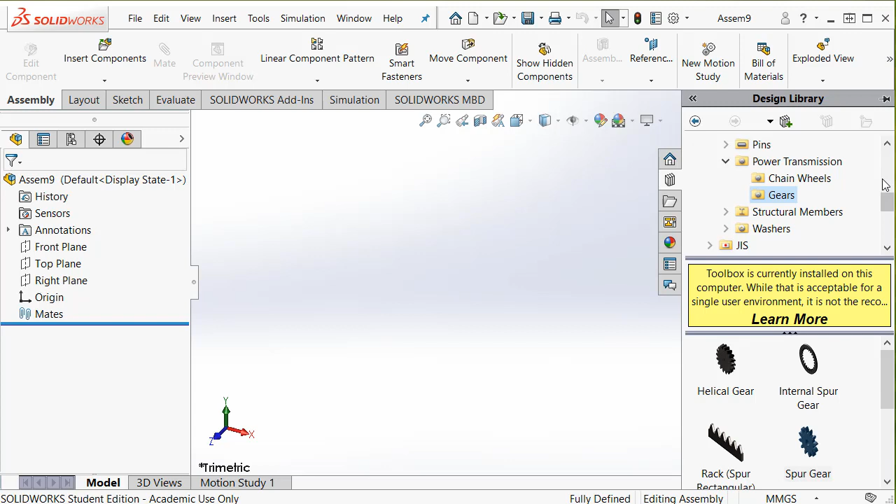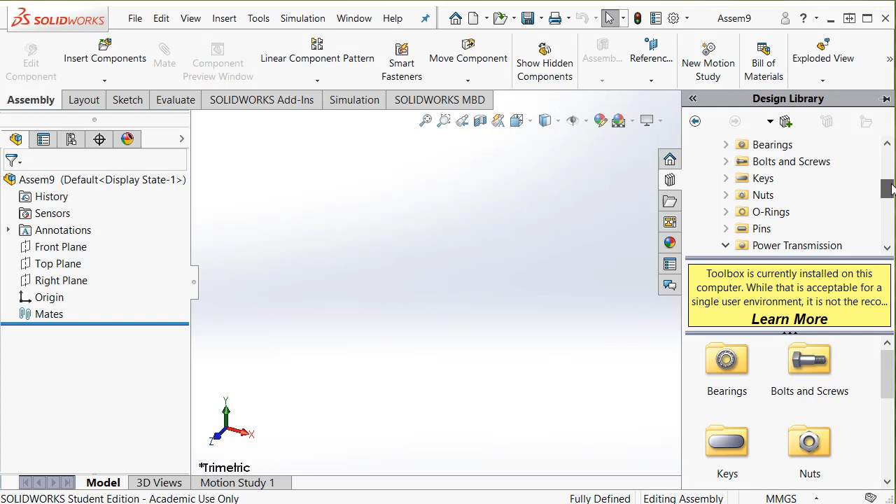Look in here, I'll just go back out of there a little bit. Yeah, see if you've got the toolbox installed. If you haven't, we'll show you how to get that done later. Then inside of the toolbox there's a whole lot of parts, but they're drawn using different standards, and we want the one using the ISO standard, so we go in there, open that, and you go down and you can find power transmission, so open that, and in there you've got gears, so open that, and here's a spur gear, so just grab the spur gear, grab it, chuck it there.

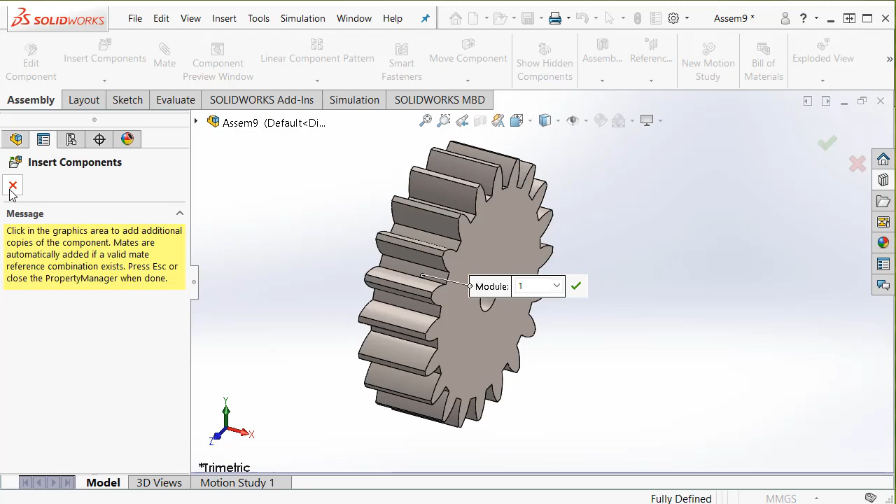Okay, now the spur gear might not be the way you want it at the moment, but over here on the side there's places where you can change it. So for this one, we're going to let the module be 1 and the number of teeth be 20, that's okay. The pressure angle can be 20, that's fine. How thick the gear is, we're setting to 6 millimeters, and the hole through the center we're setting to 3 millimeters, and that's all we have to do. We can just say that's what we want, and we've got a gear. We don't want any more of them, so we'll get rid of that, and there is our gear.

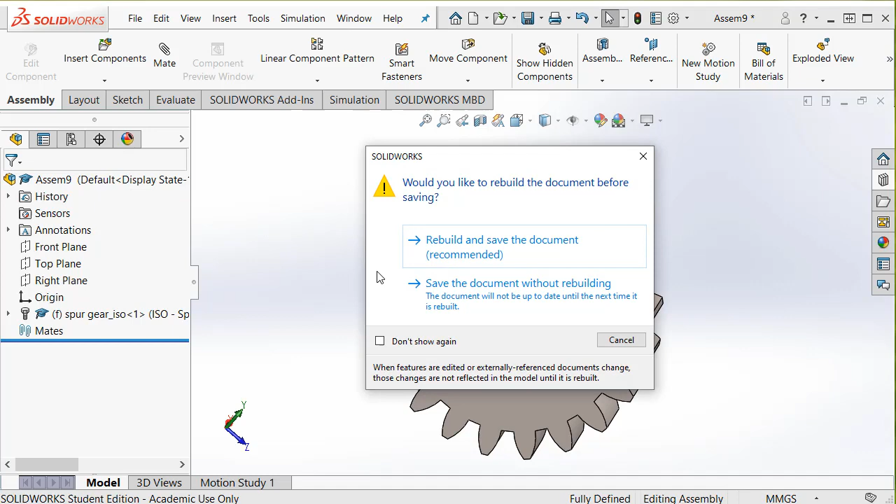Unfortunately, that's an assembly file at the moment, and we want this to be saved as a part so that we can use it to build the gripper onto. So go to File, Save As. We can rebuild it, that's alright. Save As, and here I might save it as my gear, but the important thing is to change this from an assembly to a part. That's disappeared off the top of the screen, so I'll just change it to part. There we go, we've changed it to a solid part. It's called Gripper Gear, and it's got that solid part suffix. And in my case it's going on the desktop, so that's done.

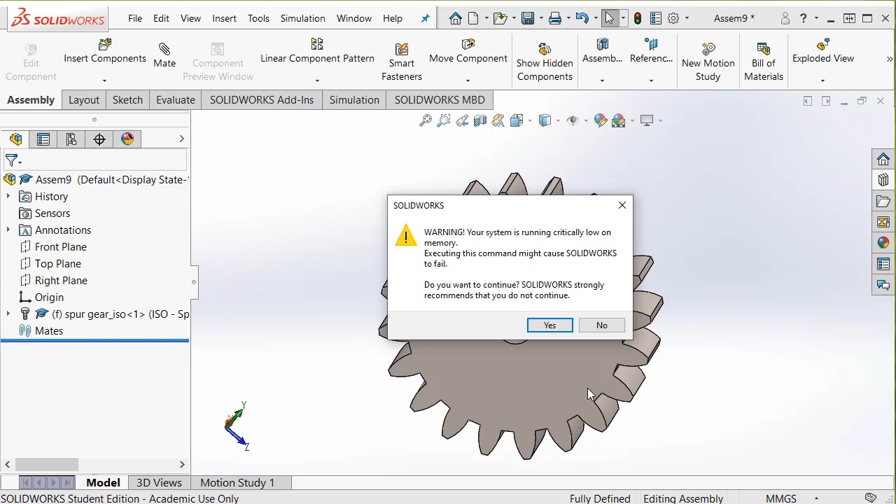Okay. We're just going to continue. Now, we don't really want that file anymore, so we can close it. And then we can go File, Open, and it was called Gripper Gear, I think. There it is. We don't want to proceed with feature recognition. So we've now got this gear opened as a part.

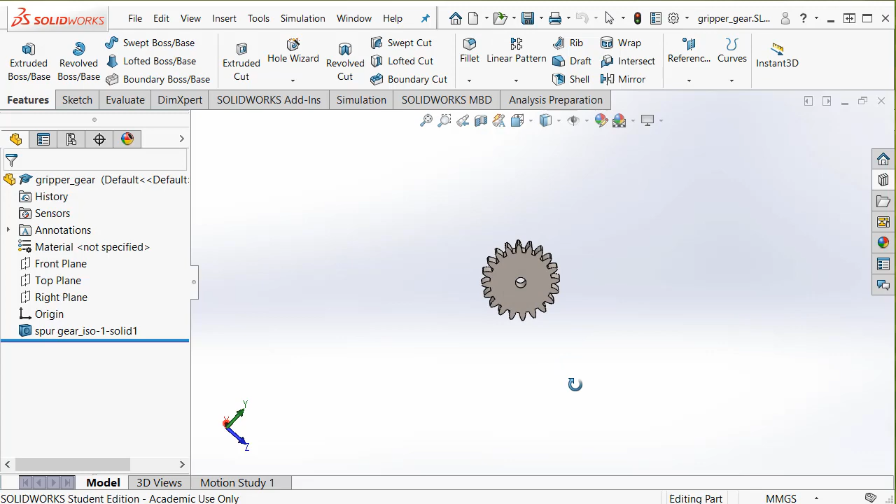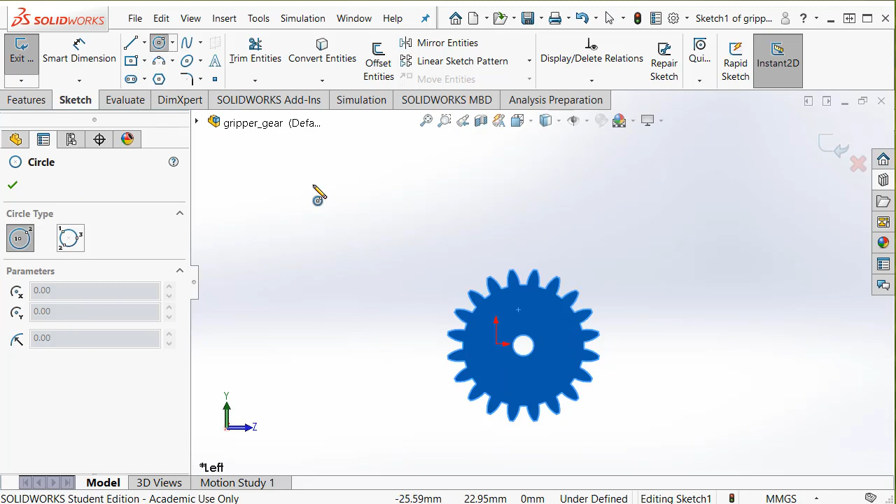Okay. So I'm just going to look straight at it. And then right click on it and draw a new sketch. So the thing that we're wanting to pick up is a cylinder whose diameter is about 36, I think. So we'll put the diameter in.

And then we'll just bring this circle so it's sitting. This is the thing that we want to pick up, and I want the center of this circle to be more or less in the middle of these two gears, so I'm going to put it about there. Okay, that's the thing that we want to pick up. So what we want the gripper to do is to follow around this line so it will nicely match that circle.

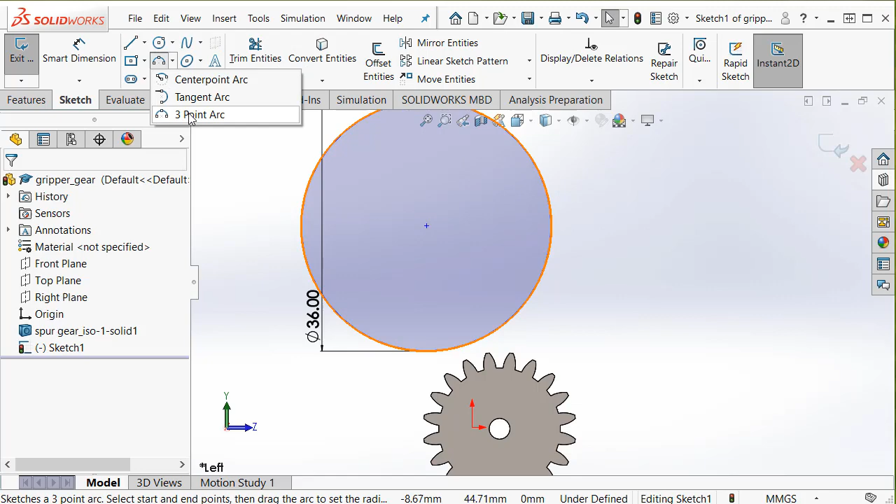And the rest of the gripper we'll put out here somewhere, so I'm going to do a 3-point arc. I'm going to start about there, and go around to about there, click onto there, and the radius of that arc, you can see it coming up on the screen there. It's about 27. I'll set it to be about 28.

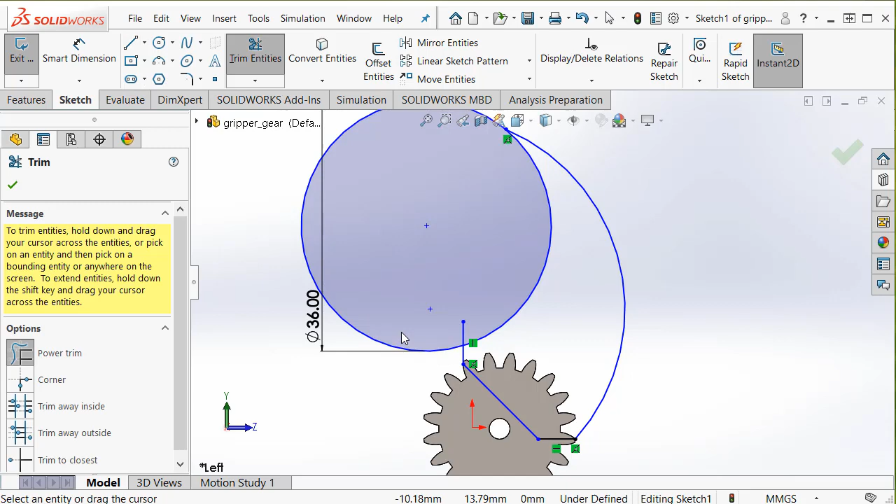And then I'm going to add some straight lines, maybe one from there up to there, and another one from there into there and across to there. Then I'm going to get the trim tool and trim some stuff out. Okay, so that's going to be my gripper. So I've finished trimming that, and now we just need to extrude that.

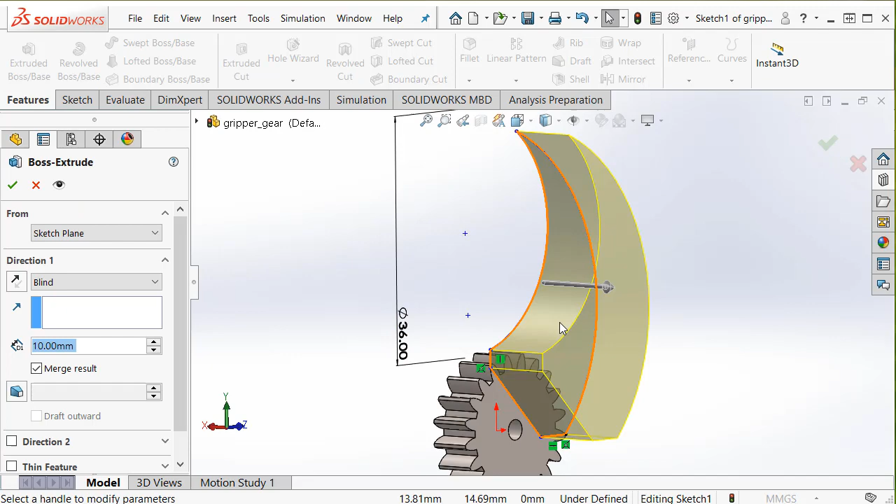So go to Features, Extruded Boss/Base, and we're going to go the other way, and we're going to go 6 millimeters. Tab on that and go Enter, tick on that, and there we have a gripper. Okay, so that's our right gripper.

Now you might think that to make the left gripper you just make 2 right ones and then just turn it around like that, and you've got the right one there and the left one there. But there's a problem with that. If the left gripper is made to be a mirror image of the right one, when you put the two together they won't mesh. You can see the tips of the gears are touching each other and the gears aren't meshing. So on the other gripper, this extra bit that we've added needs to be rotated around so that that tip goes into a valley on the other gear.

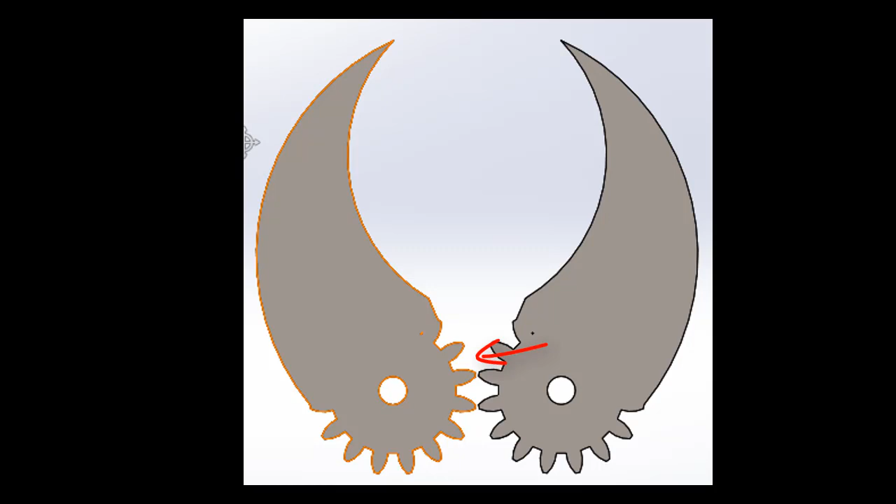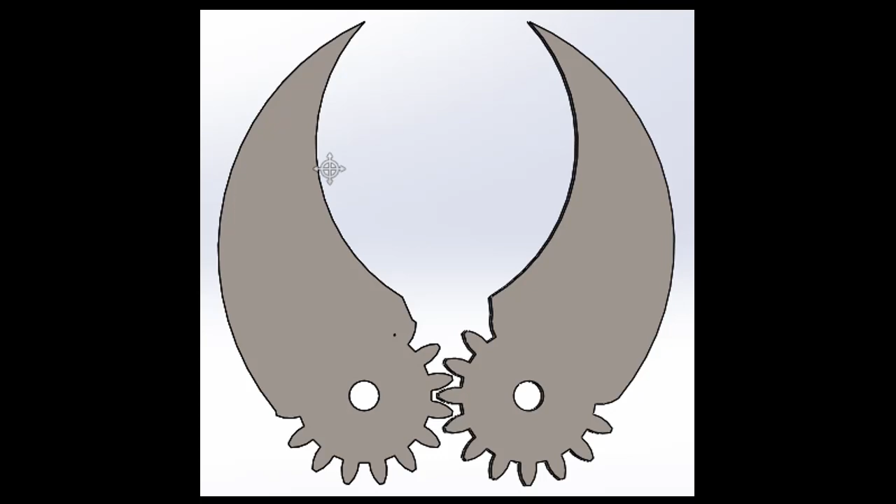With this particular gear we've made 16 teeth, and so the angle between that tip and that tip is 360 divided by 16. But if we only want to go half that distance, we need to do 360 degrees divided by 32, and that works out to be 11.25 degrees. So this whole top half of the gripper needs to be rotated around the centre by 11.25 degrees. And when we do that, you can see that the two halves will mesh. So save this one, call it the left gripper, and then we'll start on this rotation process.

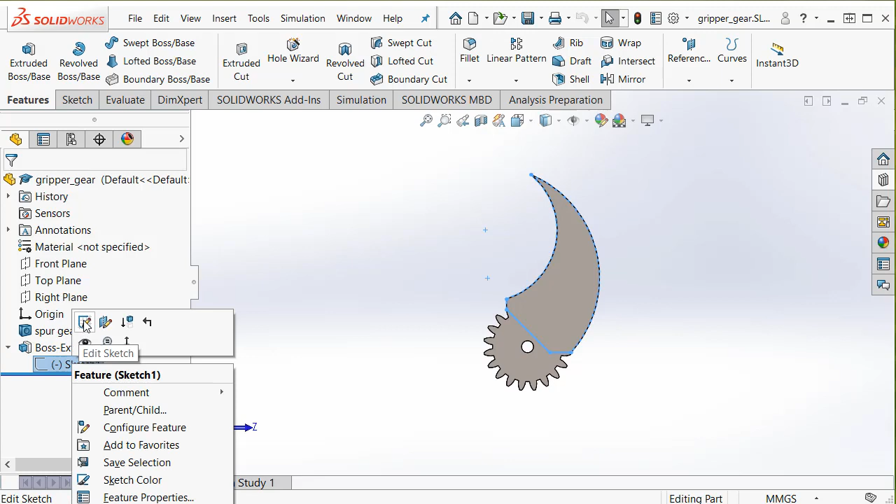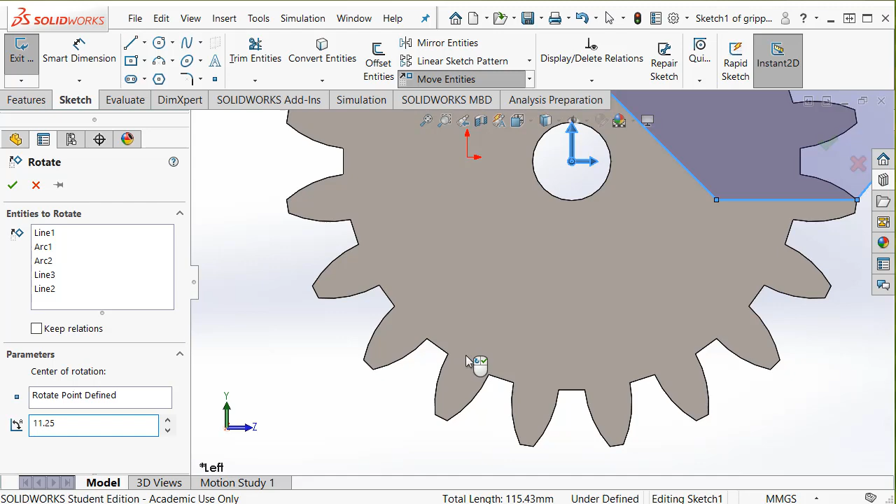Okay, we'll look straight at it again. So now we'll open up the sketch again. So we'll edit that sketch, and we'll go in here, which is Move Entities, pull that down, and we will rotate entity. Here it wants us to select the entities to rotate, so we'll select all of that. And here it wants us to define a centre of rotation, so we will select that. And here it wants us to specify the angle, so 11.25 degrees. And we will do that, and there it goes.

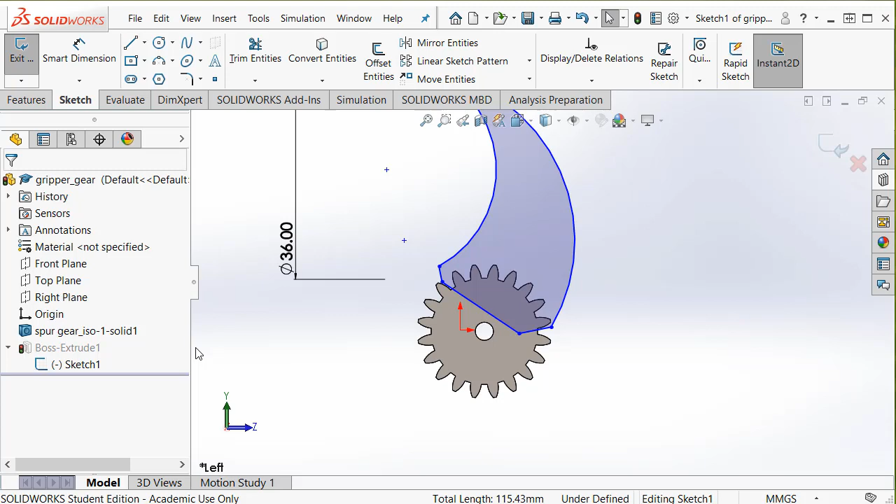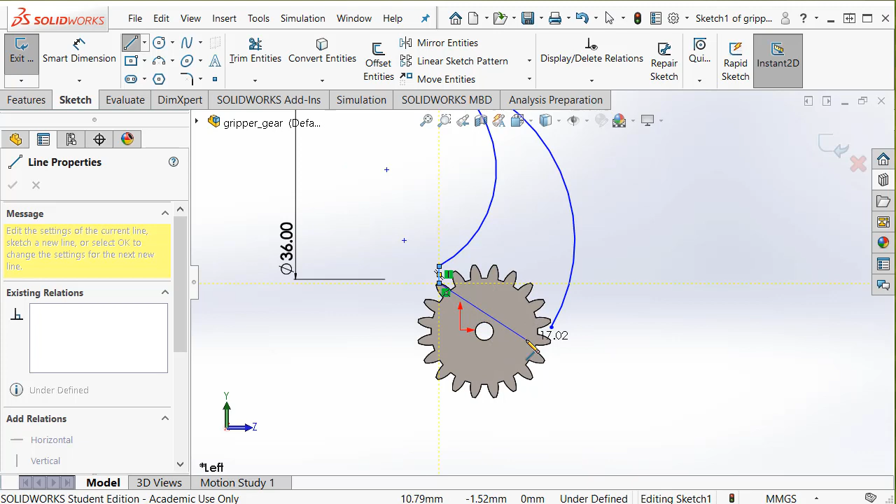And when you do that, you find that these things don't line up on the teeth very nicely anymore. So what I'm going to do is leave that rotation there and trim this line, that line. And now I will draw some more lines. I might take that line to there, to there, and to there. So that's joined on nicely again.

Finish that and exit the sketch. And now we have our right gripper, so go File, Save As, Right Gripper. And that's one way of making a left and a right hand gripper.